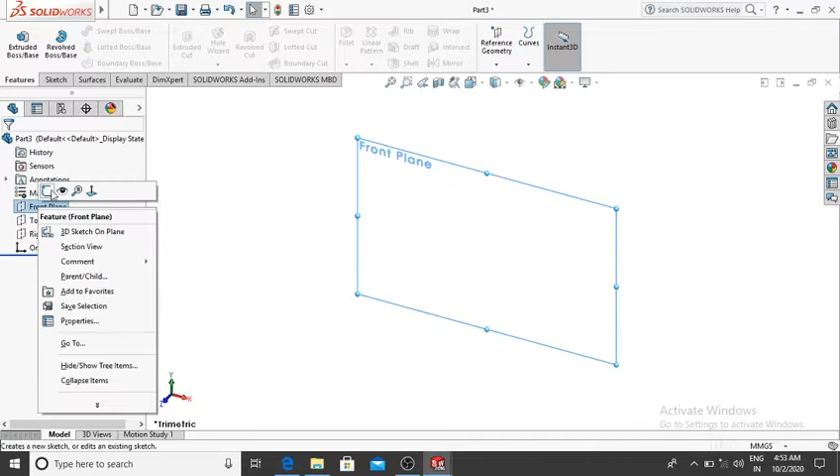Go to file, select new, select part, then OK, and change the background to plain white. Select the front plane, right click, sketch, and draw two circles from the origin point. Go to smart dimension for the second circle.

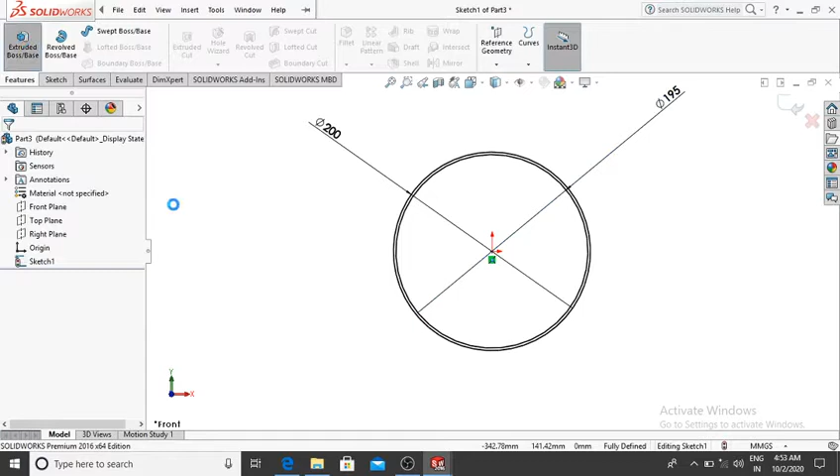The outer circle will be 200 diameter and the inner circle will be 195 diameter, then OK. Now go to features, select extrude boss base, and extrude from the mid plane. It's better to choose mid plane and make the extrude 500mm.

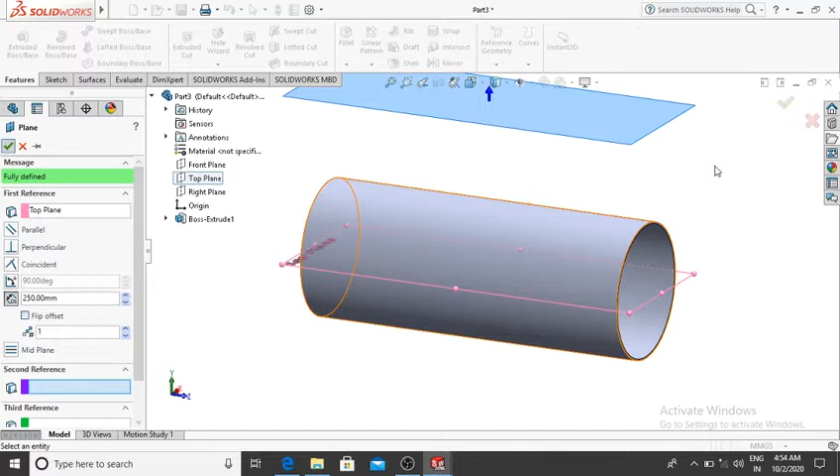Then OK. Now we create the plane above the top plane, 250mm distance. Go to reference geometry, select plane, and the first reference will be the top plane. Select top plane and make the plane. Here we give the distance, 250mm above, then OK.

Now we create this plane. Select this plane, right click, sketch, and make it normal. Select the circle tool and from this point make two circles. Go to smart dimension. The outer circle will be 200 and the inner will be 195 diameter.

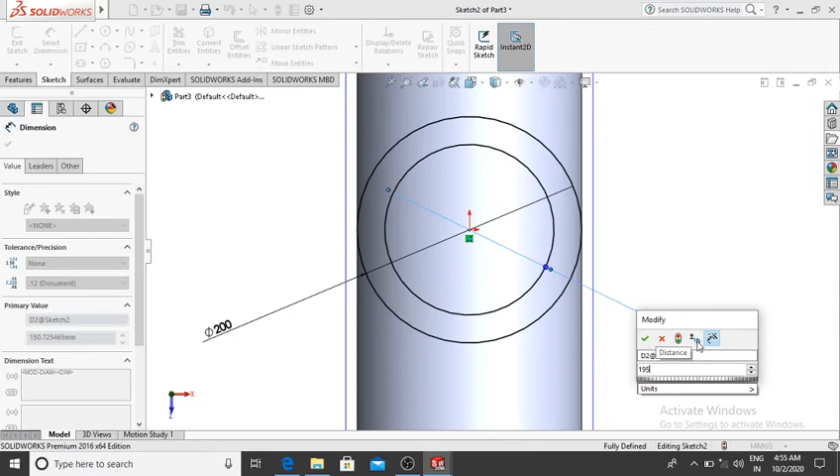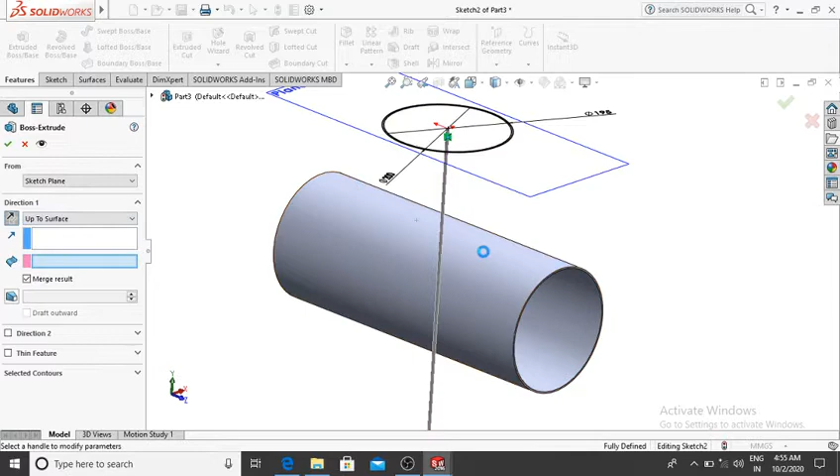Then OK. Now we extrude this sketch. Go to features, select extrude boss base, reverse direction, and set the condition up to surface. Select this surface so the portion here will be selected, then OK. Now we create this sketch on the top plane, so we hide this plane.

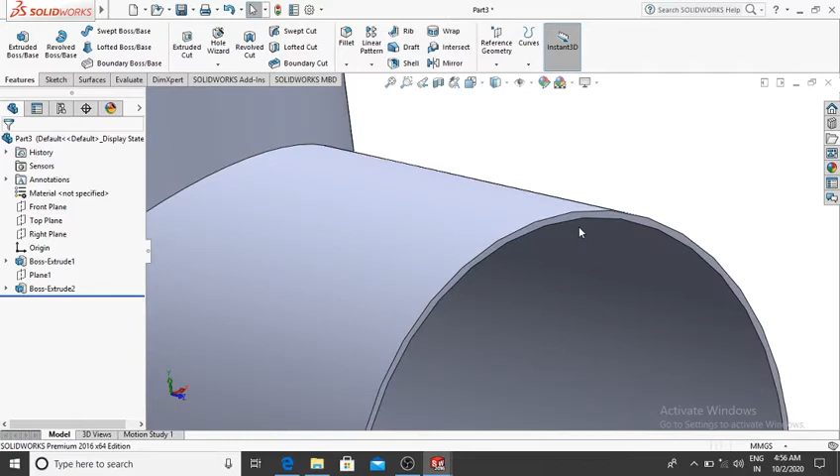Look, and again we select this face, right click, sketch, and make it normal. Select the circle tool and from this origin point make two circles. The first circle will be 205 diameter and the second will be 199.8.

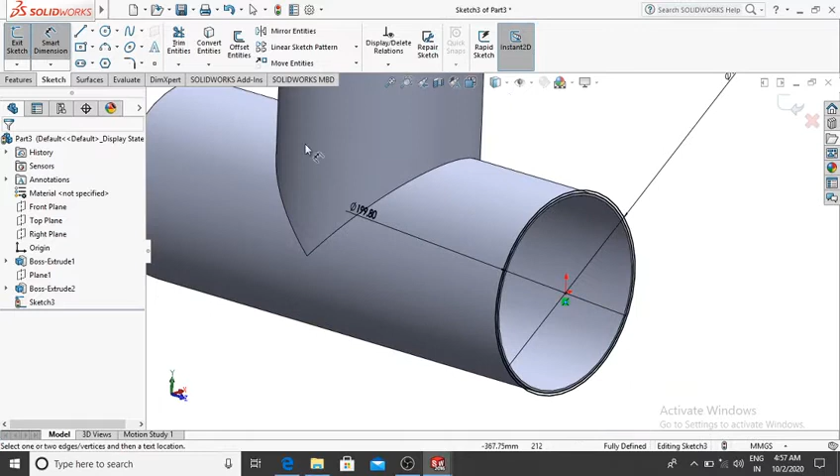Now make the extrude for this sketch. Go to features, select extrude boss base, extrude up to only 45mm, make it reverse direction so it comes out reversed, and set merge result, then OK.

Now we create this sketch, and here we make the...

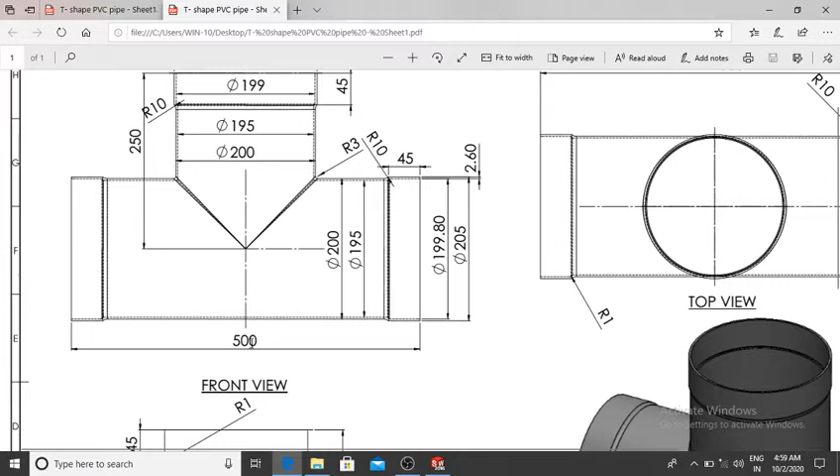Thanks for watching. To create this PVC pipe, let's see the drawings. We make two circles: the outer circle will be 200 diameter and the inner circle will be 195 diameter, extruded 500mm. Then we make a plane above the top plane 250mm, and again make a sketch with 200 diameter and 195 diameter, extruding up to this surface.

So here we create all the sketches in SolidWorks. Let's look at how we create this simple PVC T-shape pipe design in SolidWorks.

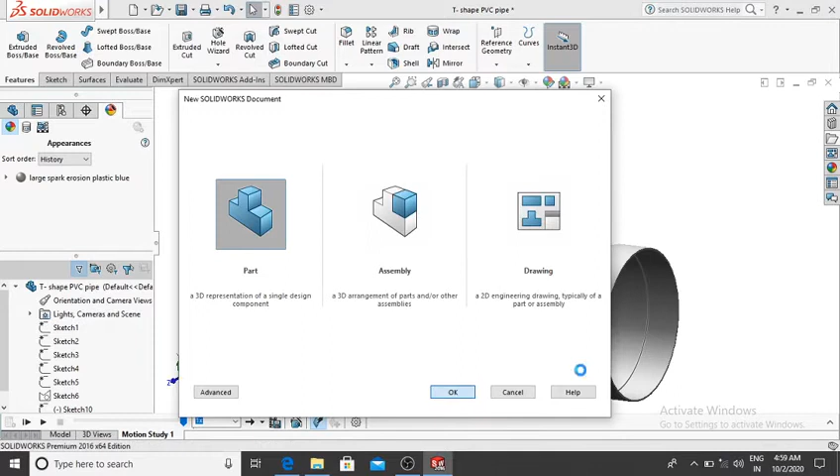Go to file, now select new, select part, then OK, and change the background to plain white. Select the front plane, right click sketch, select two circles from this center origin point, then go to smart dimension and make it 200mm.

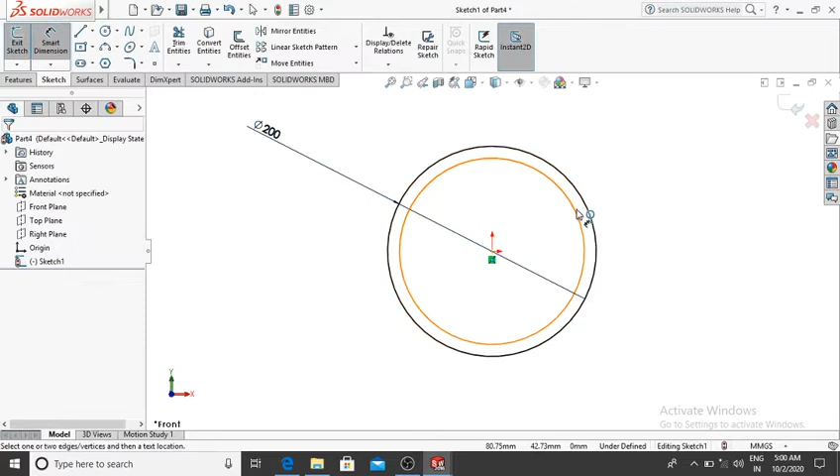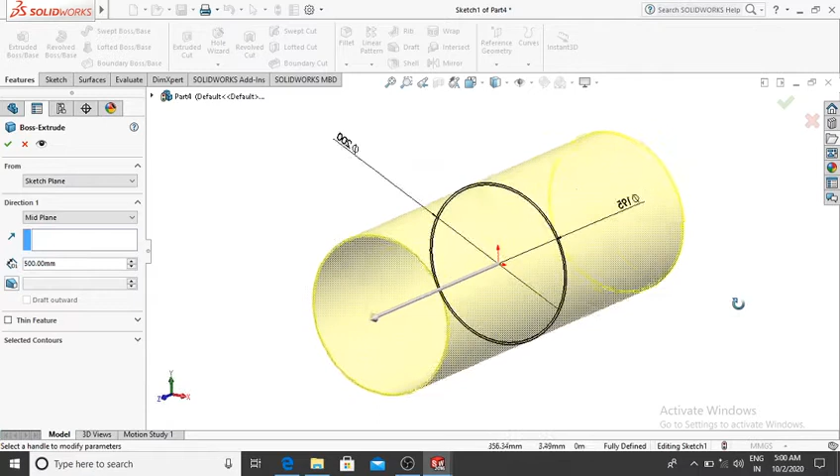The second circle will be 195 diameter. Go to features, select extruded boss/base, extrude from the mid plane, and make the extrude 500mm, so it extrudes from the mid portion of this sketch, then OK.

Now we create one plane above the top plane. Go to reference geometry, select plane, and the first reference will be the top plane.

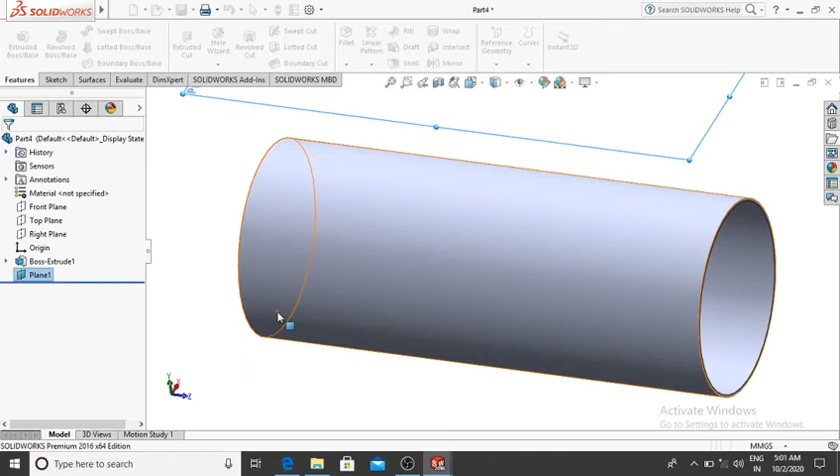Select top plane and make the distance 250 mm above, then OK. Now select this sketch, right click sketch, and make it normal.

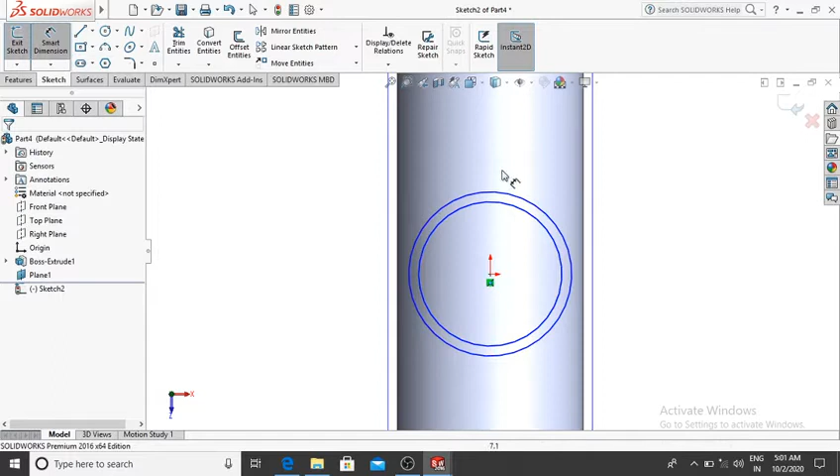Select the circle, and here we make two circles. Go to the smart dimension. The first circle will be 100, 200 diameter, and the inner circle will be 195 diameter, then OK, and make the extrude.

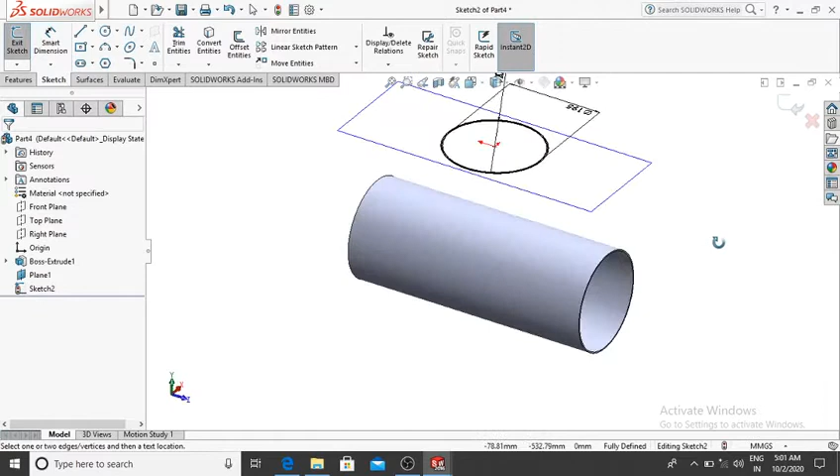Go to features, select extrude boss base, make it reverse direction, and make the condition up to surface. Select up to surface, and select this outer surface of this pipe. Now again select this face.

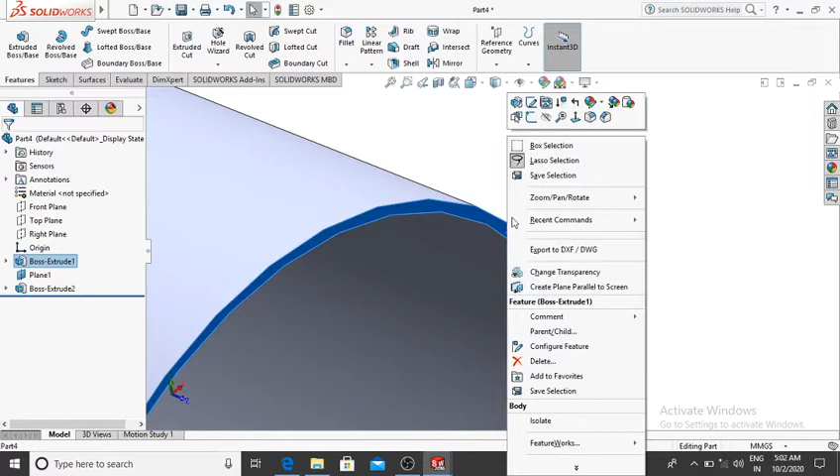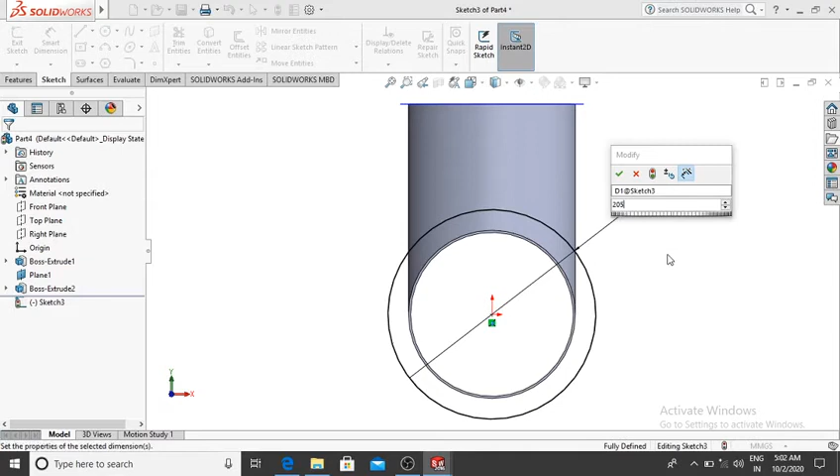Right click, sketch, normal, and select the circle, select this point and make the circle. Go to the smart dimension, make the diameter 205, and again select the circle, and from this point make the circle up to this one.

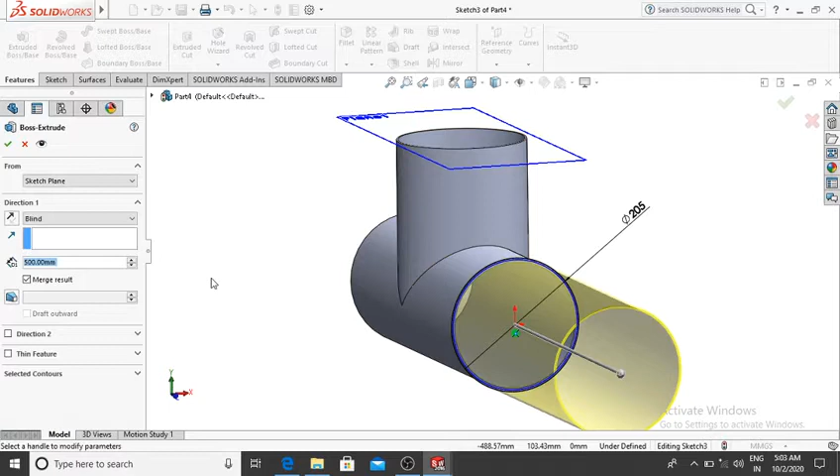Now go to features, select extrude boss base and make the extrude 45 mm, reverse direction, and make it merge.

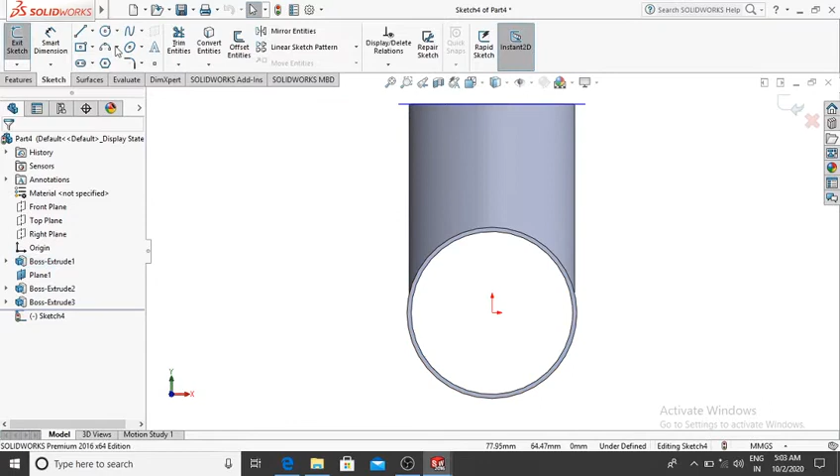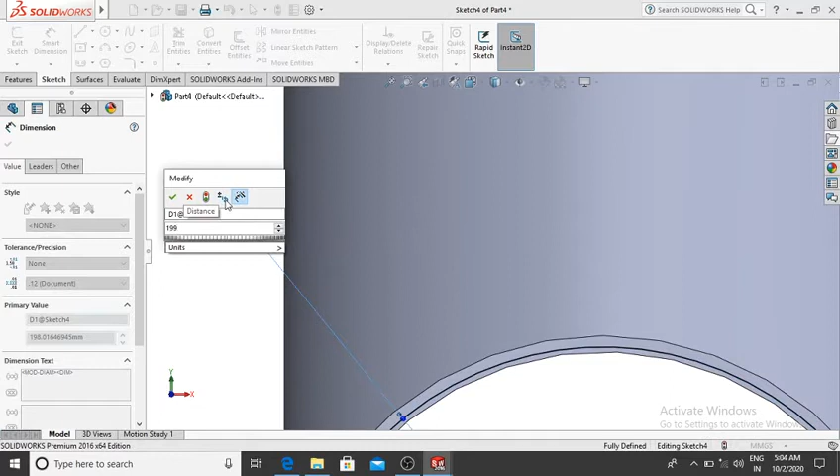And again select this face, right click, sketch, and make it normal. Select the circle, and from this point make the second circle here. Go to smart dimension and make it 199.8 diameter.

Make the extrude cut. Go to features, select extrude cut, and make the extrude cut 45 inside, then OK. Now here we make the mirror to this.

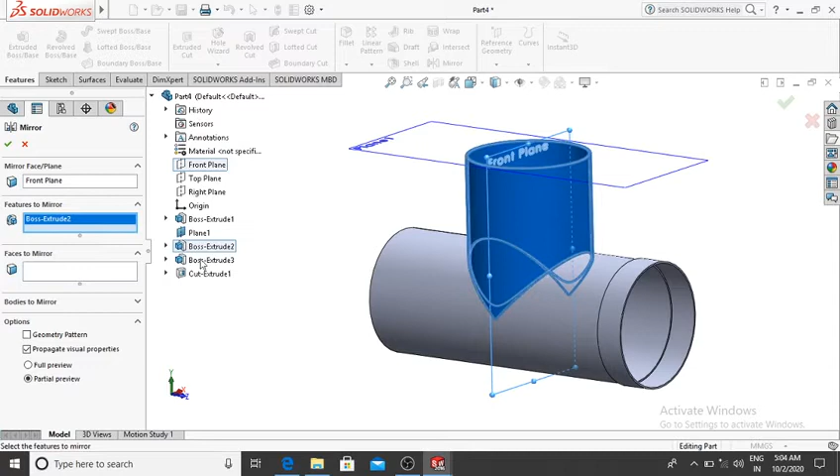Go to the mirror and select the front plane, and here we select, so remove it. Select this one and this, cut, extrude.

Then OK. And here we make the fillet 10 mm. Go to the fillet and make the fillet 10 mm on this edge. OK.

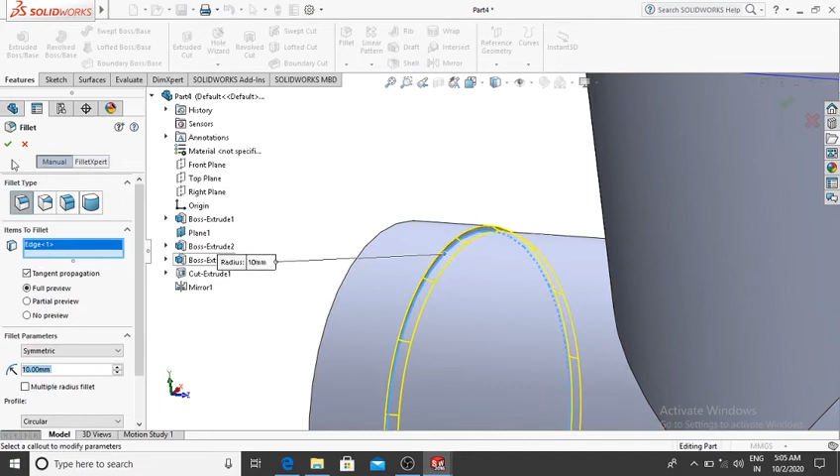Now again select the fillet and make the fillet 10 mm here, then OK. And make the inside fillet, so make it 1 mm inside.

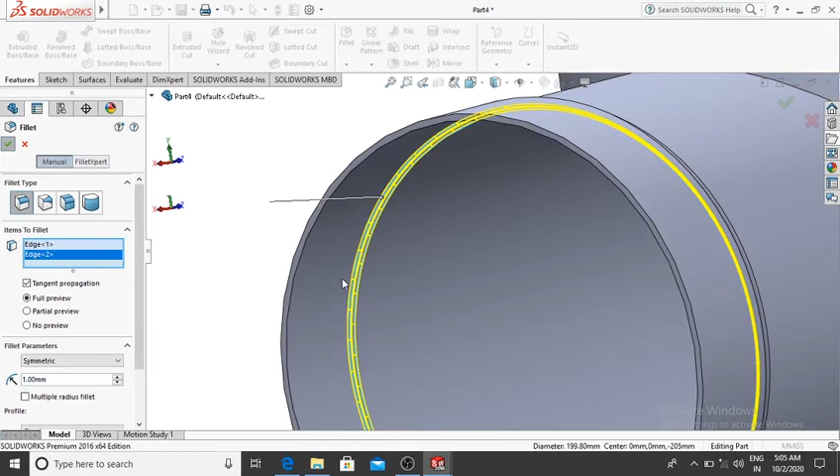Select this one and this, again select and make the fillet 1 mm. Select this edge and this edge, then OK.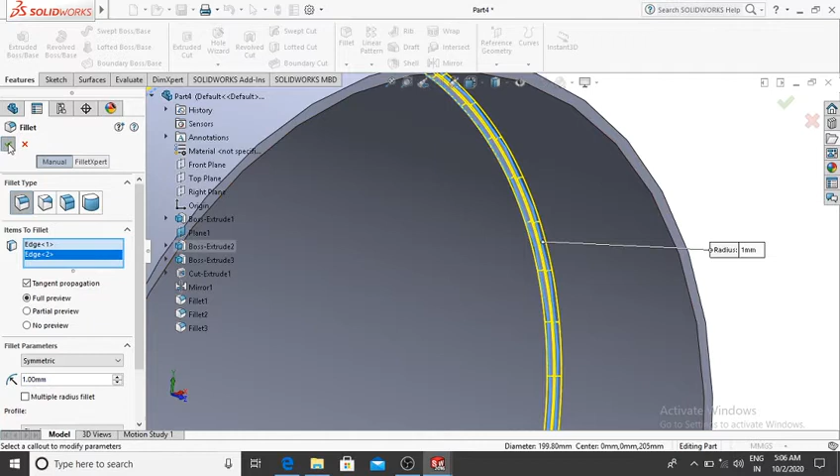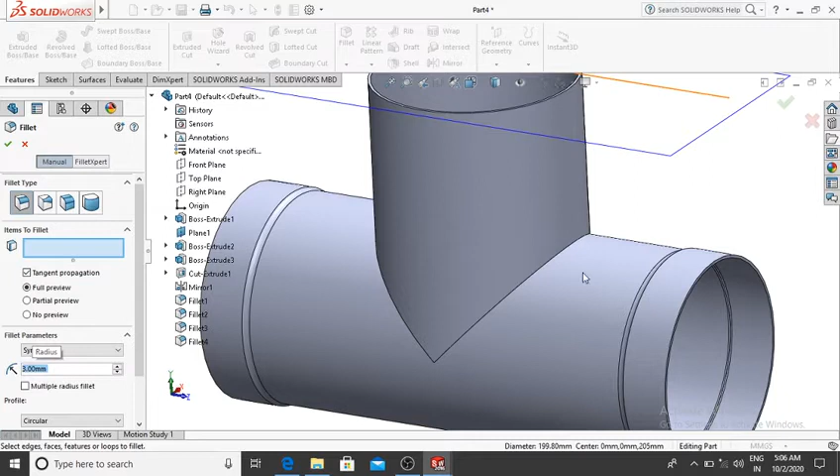And here we make the fillet also. Go to the fillet and here we make the fillet of 3 mm, and now select this edge, so select this one, then OK.

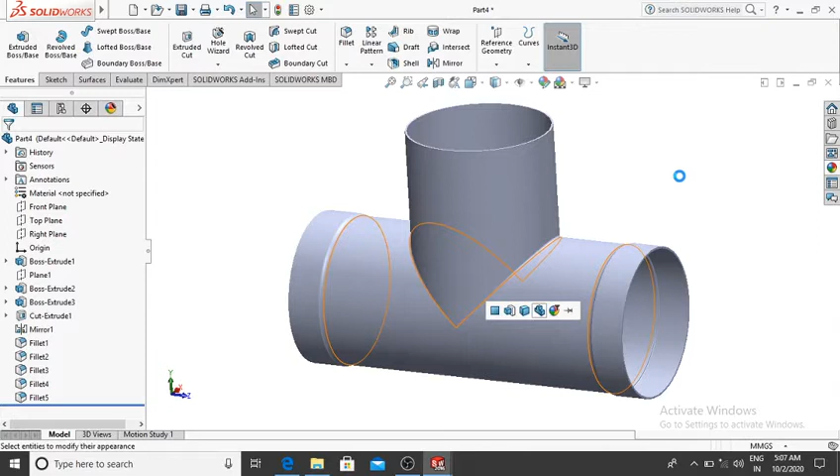If you want to apply material for this piping, go to the appearance and select plastic, select EDM plastic, select and simply drag to this part. So here we change the color, make it this color, is looking far better.

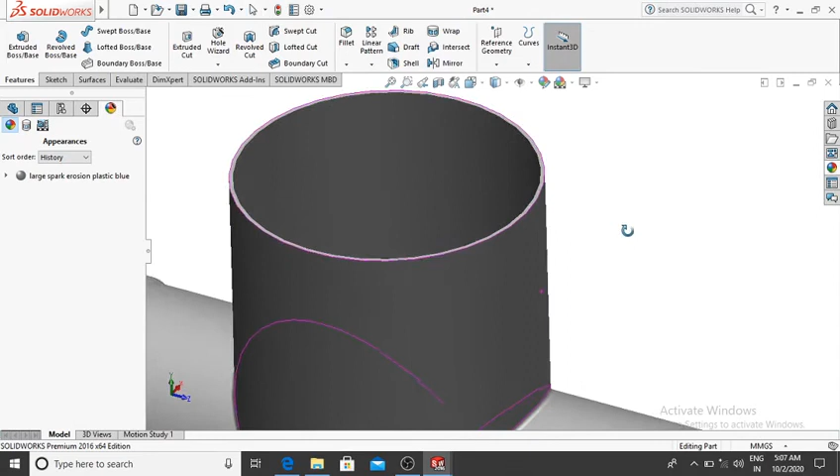And here we also create the sketch on this. First of all we make the extrude cut on this face. So select this face, right click, sketch, and go to convert entity, and now select the inside edge.

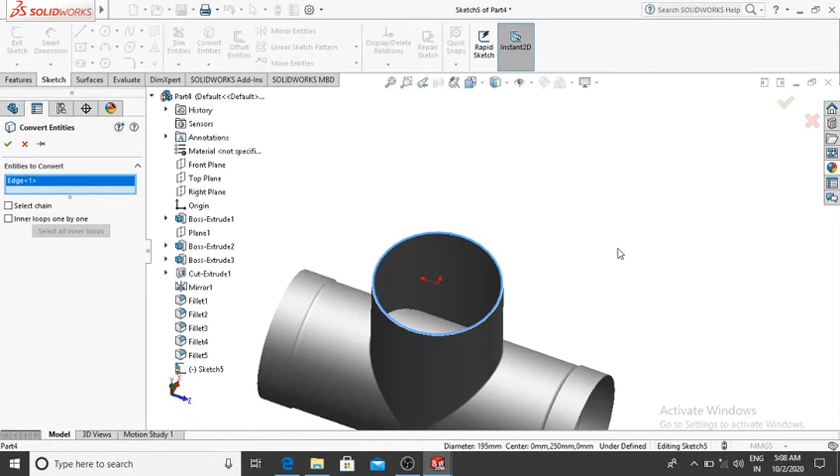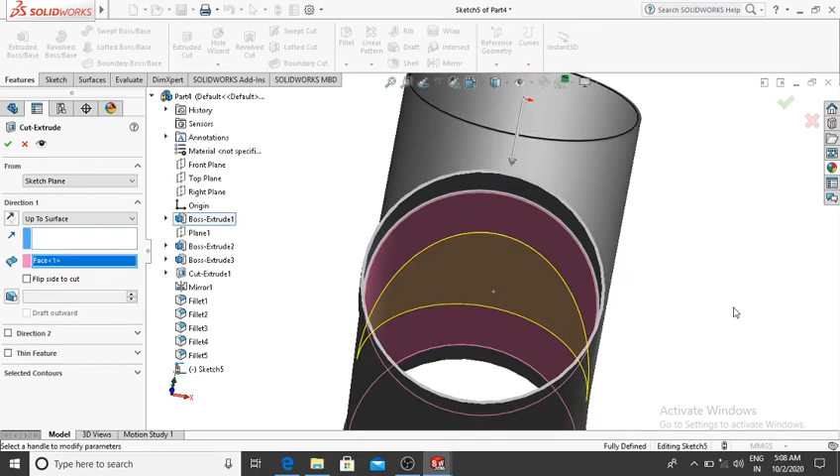Then OK, and go to features, select extrude cut, and make the extrude cut up to surface, and just select this surface, this inside surface. So it will be selected, this portion. Now we just extrude cut this face.

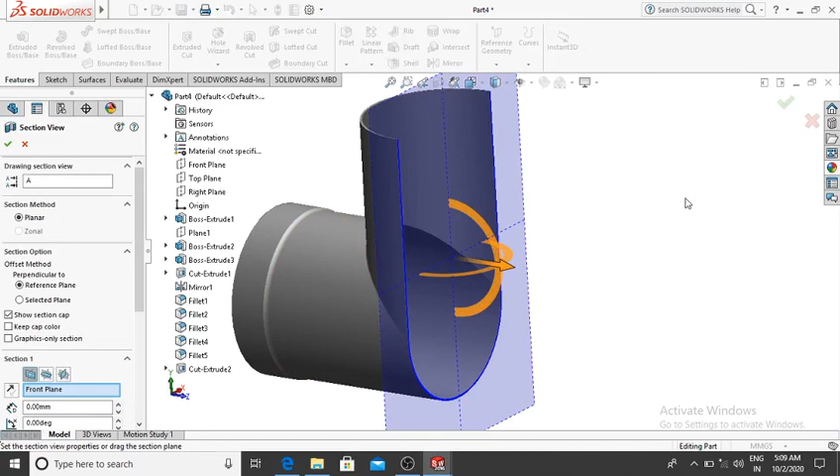If you want to see the section view, go to the section view. Look how we extrude cut this, and now here select front plane.

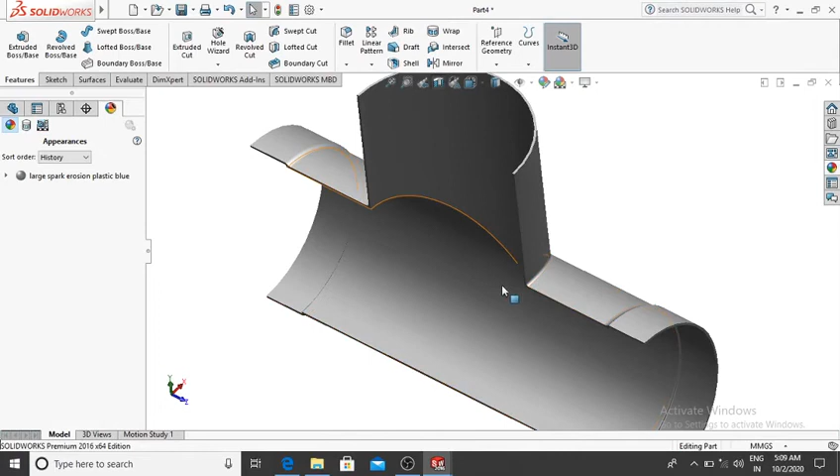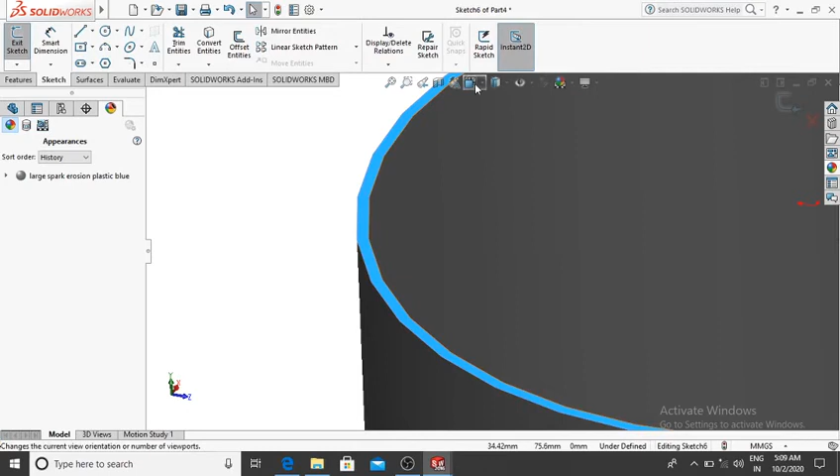So look how we cut this portion here. And again we make the sketch on this top face. So select this face, right click, sketch, and make it normal. And here we select the circle, and from this origin point go to the smart dimension.

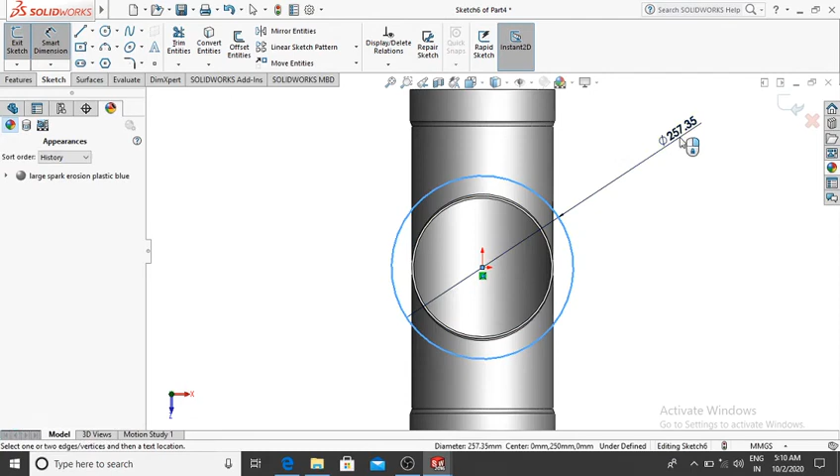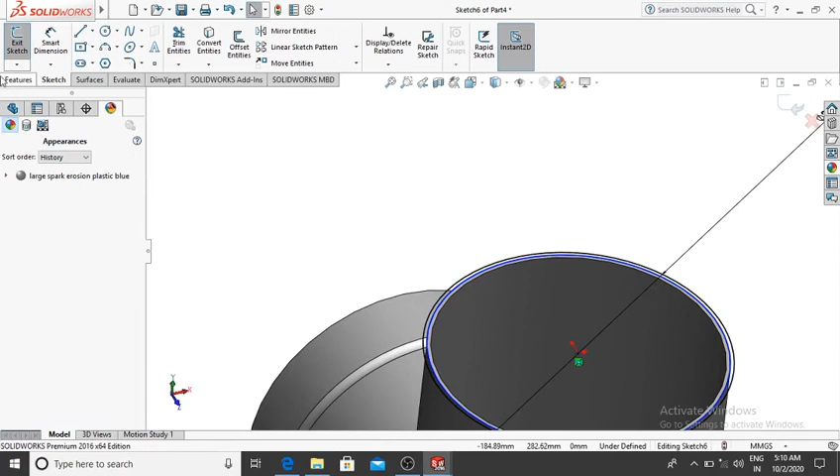Its length will be 205 diameter, and again select the circle, and from this origin point we make the circle up to, make sure it is tangent to this edge. Now go to the feature, select extrude boss base, and extrude up to 45 mm, and make the condition reverse direction, then OK.

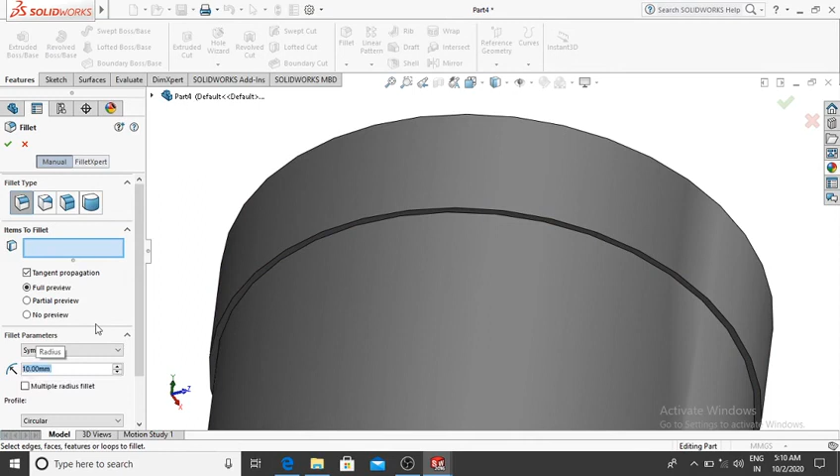And here we also make the fillet of 10 mm. Go to the fillet and make the fillet 10 mm, and select this edge, then OK.

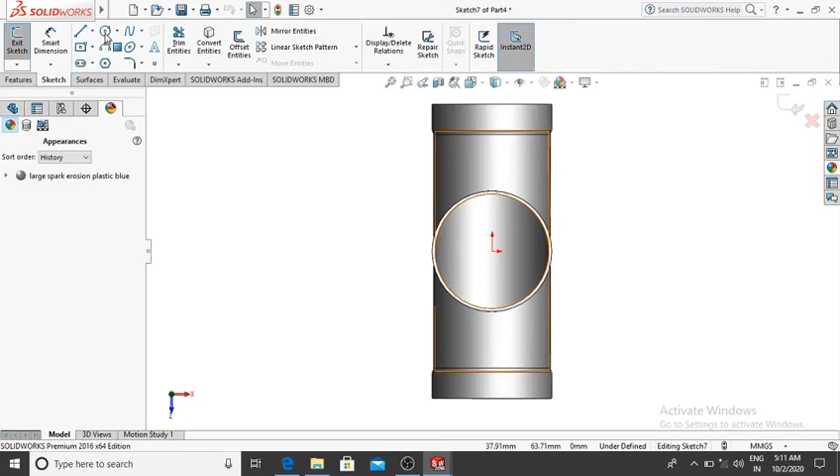Now here again select this face, right click, sketch, and make it normal. Now again select the circle, and make the circle from this origin point, and make up to here.

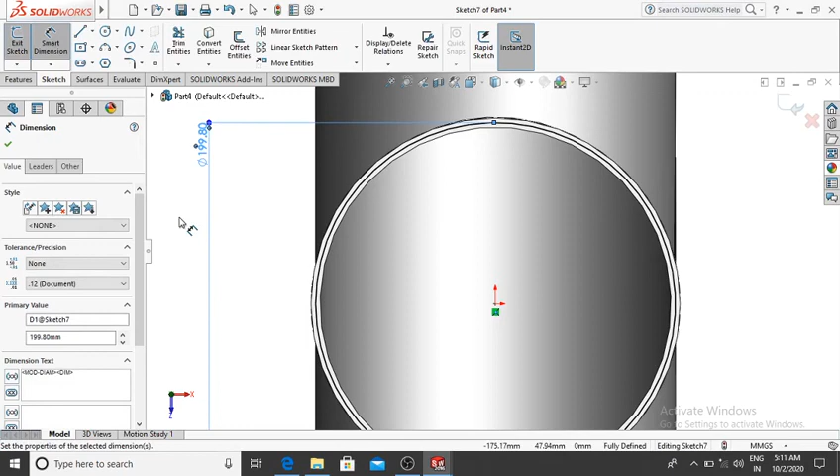Now go to the smart dimension and make it 199.8, and make the extrude cut. Go to the feature, select extrude cut, and make the extrude cut 45 mm, then OK.

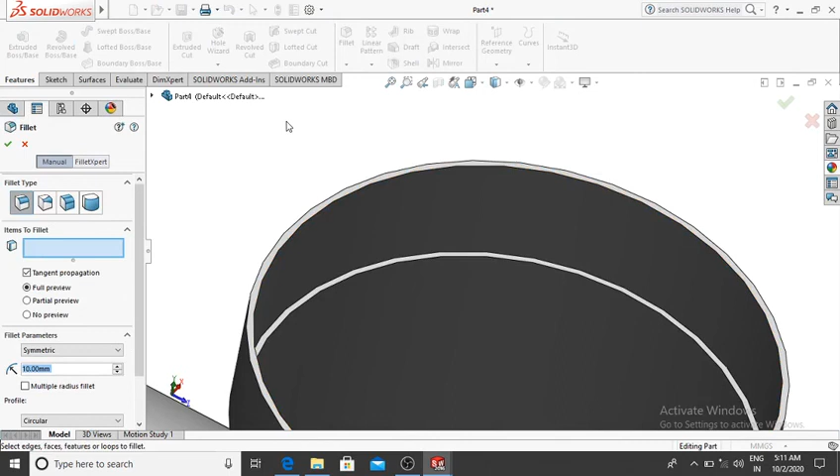Now here we make the also fillet of 1 mm. Go to the fillet and make the fillet 1 mm, both corners, then OK.

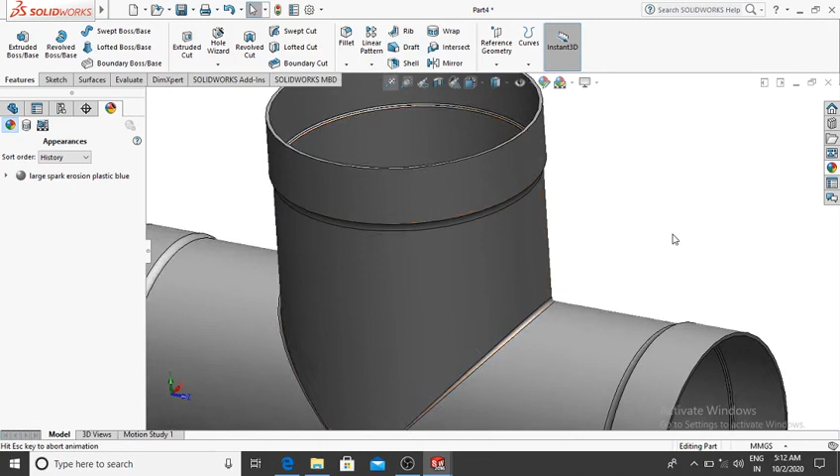So now we create this simple PVC pipe design in SolidWorks, and I hope you like it. Thanks for watching.